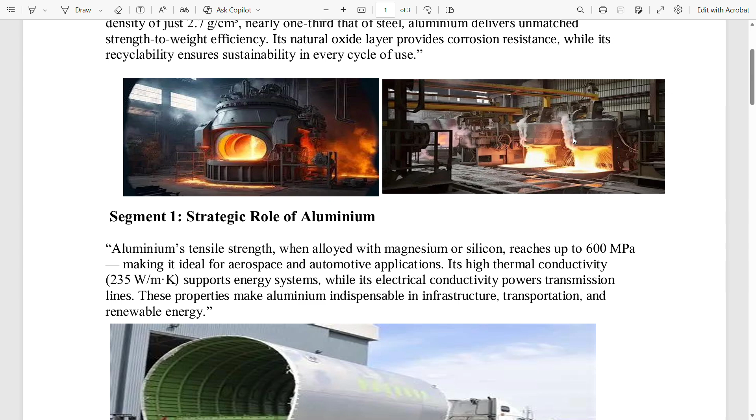Now, segment one, strategic role of aluminium. Aluminium's tensile strength, when alloyed with magnesium or silicon, reaches up to 600 megapascal, making it ideal for aerospace and automotive applications.

Its high thermal conductivity of 235 W/m.K supports energy systems, while its electrical conductivity supports power transmission lines. These properties make aluminium indispensable in infrastructure, transportation, and renewable energy.

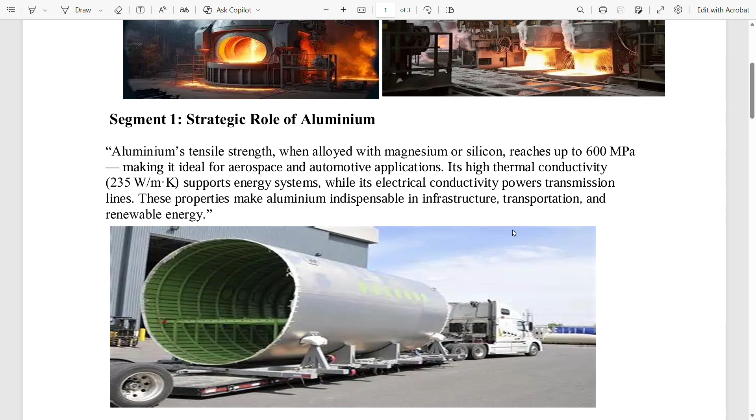Now, how URGS International, our company, provides services for aluminium engineering excellence. URGS International Engineering Services Private Limited provides direct factory supply of aluminium products.

We have tie-ups with many factories worldwide to directly supply these products to the customer, ensuring cost-effective sourcing without intermediaries. There is no role of intermediaries, so this is cost-effective for the clients or customers.

Our metallurgical consultancy integrates alloy design, process optimization, and quality assurance, enabling industries to achieve performance benchmarks with precision. We are metallurgical consultants, so we have a good team of metallurgical engineers and consultants who are all experienced in this field, with more than 35 plus years of experience. They support and provide all types of metallurgical consultancy for aluminium products.

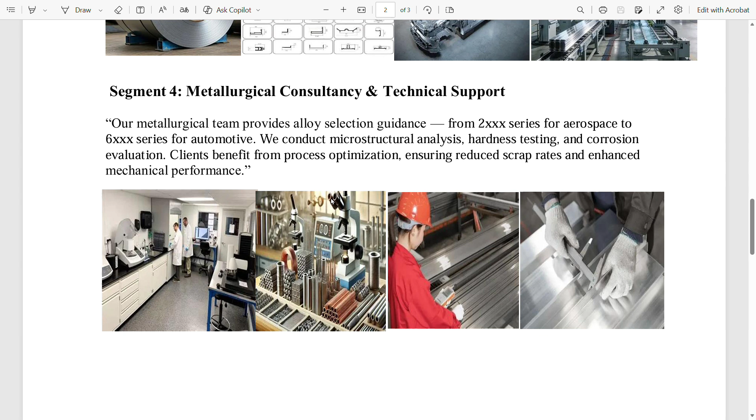Our metallurgical team provides alloy selection guidance, from 2XXX series for aerospace to 6XXX series for automotive. We conduct microstructural analysis, hardness testing, and corrosion evaluation. Clients benefit from process optimization, ensuring reduced scrap rates and enhanced mechanical properties.

Now, segment five, sustainability and global reach. Aluminium is infinitely recyclable, requiring only 5% of the energy compared to primary production.

URGS leverages global supply chains to deliver competitively priced aluminum while supporting circular economy practices. Our reach extends across infrastructure, energy, and manufacturing sectors worldwide.

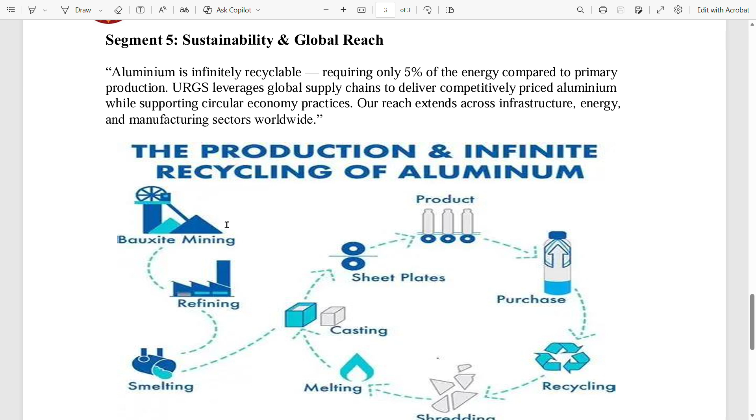You can see the production and infinite recycling of aluminum in this picture. Here you see bauxite mining, then refining, then smelting, and this goes to melting and casting. Melting casting produces sheet plates, then products, which are purchased by the end client, then again recycling, and this goes for shredding, then again it goes to melting, casting, sheet plates, products, purchase, recycling. So this is a cycle.

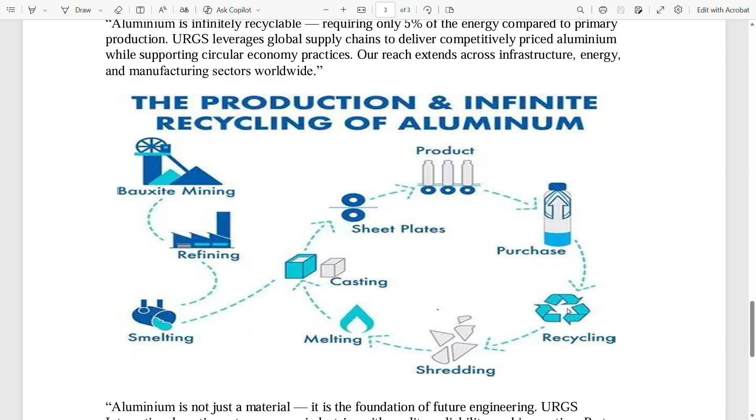So aluminum is not just a material, it is the foundation of future engineering. URGS International continues to empower industries with quality, reliability, and innovation. Partner with us to shape the next era of industrial excellence.